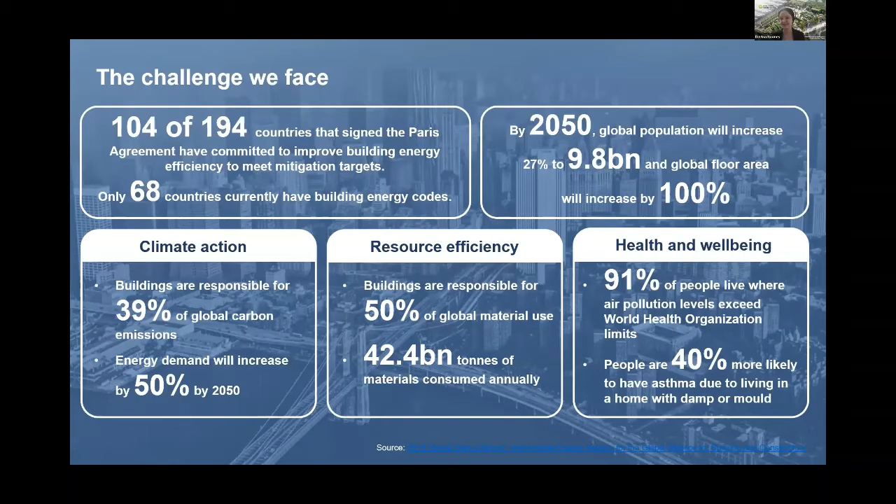If we're going to get to net zero, which all the critical reports tell us we need to do, it's fundamental for our planet that we go after the built environment sector first. It's a big opportunity, and there are a large number of simple, practical things we can do in the built form. When we say 39% of carbon emissions, that's our focus on climate action. When we say there's a huge amount of materials going into this space, that relates to circular economy. And as we've seen in the last 18 months, health and well-being are fundamental.

A big discovery moment for Australia was in the horror bushfires of 2019, 2020 - we realised just how important our air quality was. Or in the pandemic over the last 18 months, there's been absolute clarity in that area.

One of the things I draw out is when there's a headline like climate action, what does that mean? It means net zero buildings, highly efficient buildings powered by renewables. It means we need to design our buildings for the future and look at nature-based solutions. So when we look at the detailed areas we seek to unpack from buildings, they come from these global trends.

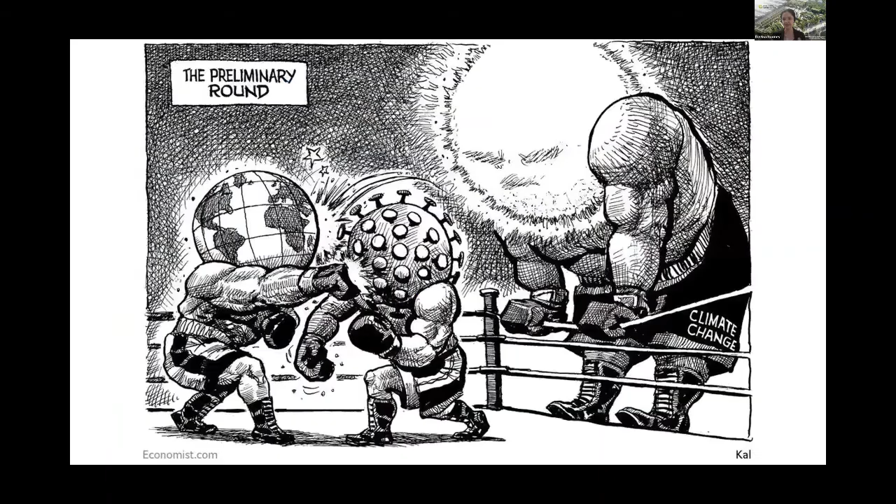Sometimes people say to me, how do we possibly focus on the environment while everything else is happening in the world right now? It's been a pretty COVID-dominated world in the last 18 months, but I think back to this cartoon from The Economist that shows planet Earth in round one with the coronavirus in the preliminary round, while the heavyweight of climate change is waiting for the later part of the discussion.

What's really clear, and what we've seen from governments around the world, is there's a real opportunity for renewal in green investment in these contexts. This is kind of the last chance saloon, as Charles said to the Australian Prime Minister this morning. If you're looking at COP, we really need to be focusing on that as our last chance saloon.

Within the last 6 weeks, a really important report, the Intergovernmental Panel on Climate Change, came out - the first of 3 reports - looking at what this means for the world in the future. The thing that report told us is that globally, we're already at 1.1 degrees over pre-industrial levels. Within Australia itself, we're at 1.4 degrees.

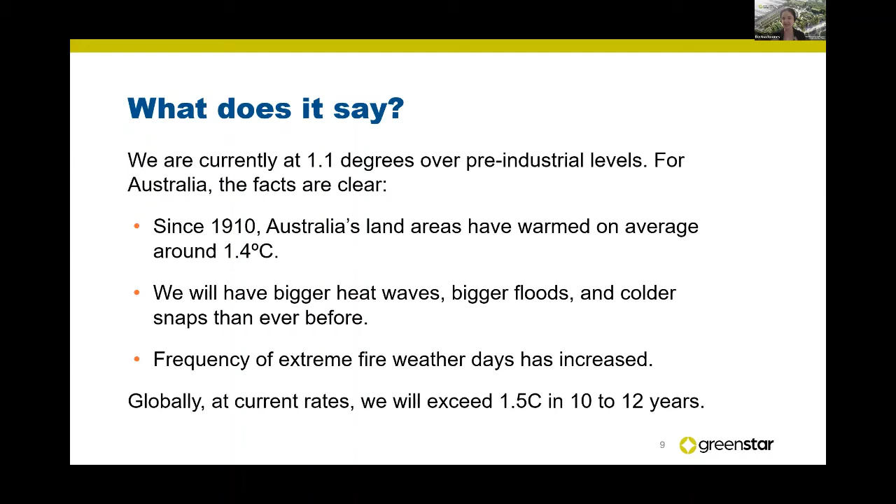What we know is we're going to see bigger heat waves, bigger floods, colder weather snaps, and increased frequency of extreme events. If we keep going at current rates, we're going to exceed 1.5 degrees, which is considered by most scientists as a critical tipping point, in 10 to 12 years. This is the red alert report that we absolutely need to see and see how we can change. It recommends strong, rapid and sustained reductions, net zero emissions by 2050 at the latest, and a focus on nature-based solutions.

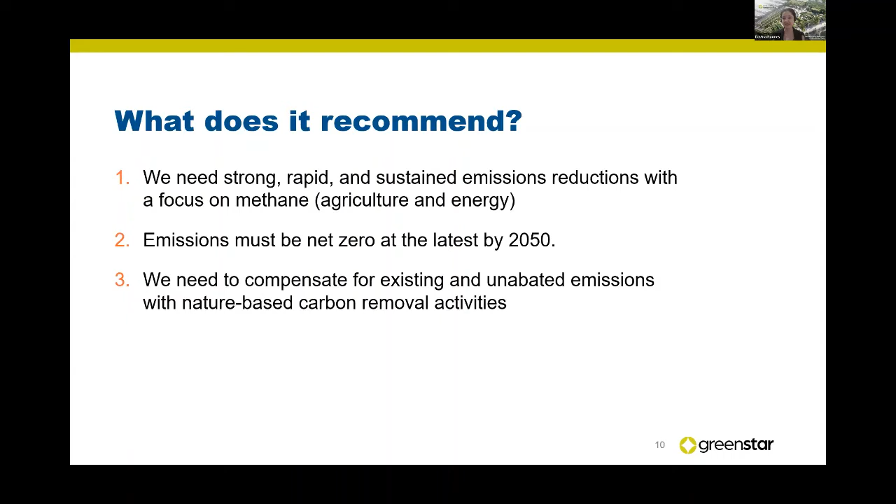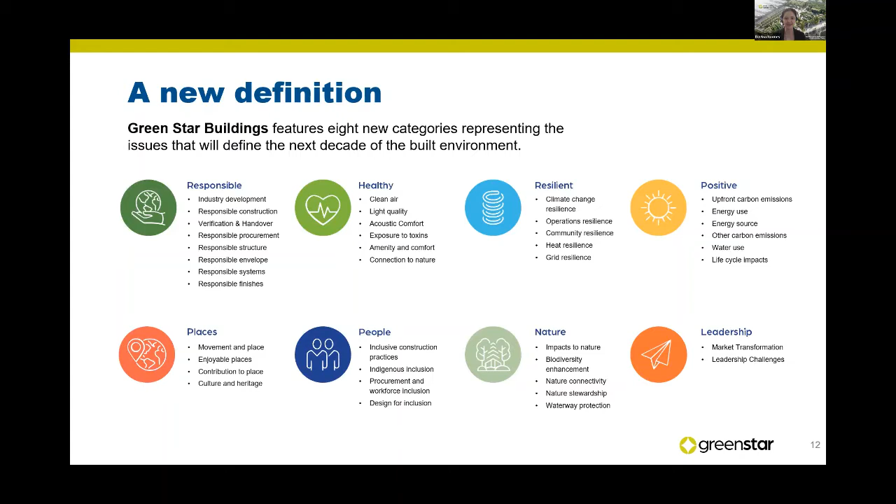So many of us would say, how does this possibly relate to buildings? It means we need responsible, healthy, resilient and positive places designed around people and nature. In practical terms, some of what you'll see Jonathan unpack is that we need buildings with an enormous focus on light quality and daylight. We need them focused on net zero, driving efficiency to the absolute limit, so we can have the most efficient buildings, ready for net zero or delivering net zero now.

That needs to be an enormous focus on this space, whilst we look at biodiversity impacts and a whole suite of issues.

But one of the things that's really heartening to see in these spaces is when we line up what we want to achieve and translate them, take the global trends, translate them into rating tools, projects like the one we're about to discuss, and embed them in their projects, and we can see those really clearly implemented. So Burwood Brickworks, which is the project behind me's...

6-star Green Star rated. It has more renewables, so it's net zero in operation. It actually produces more energy than is used on site. It's also water positive. It also has rooftop gardens that are used in some of the restaurants inside, and aspects of which are open to the community. So really project examples, bringing these concepts to life.

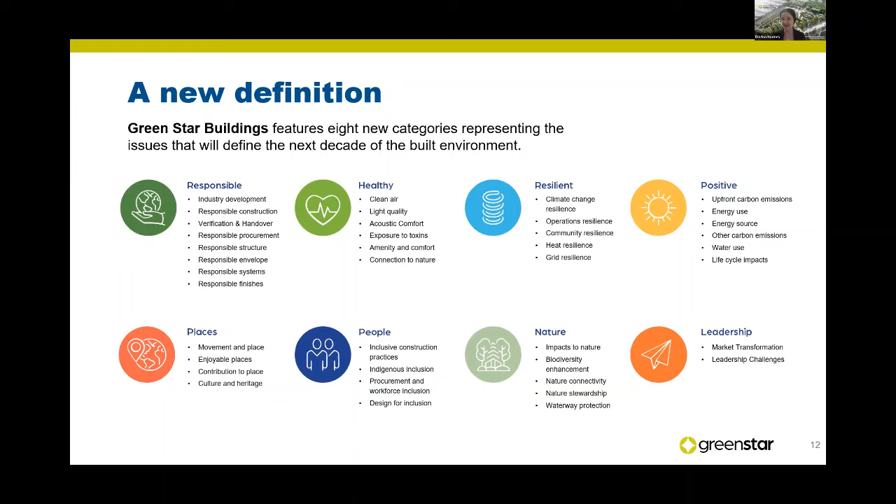And what I'm really enthusiastic about is we're going to use this discussion to unpack how do we take these ideas, how do we take a case study, and then how do we implement them, and hear great questions from the audience. How do we actually implement more of those at scale?

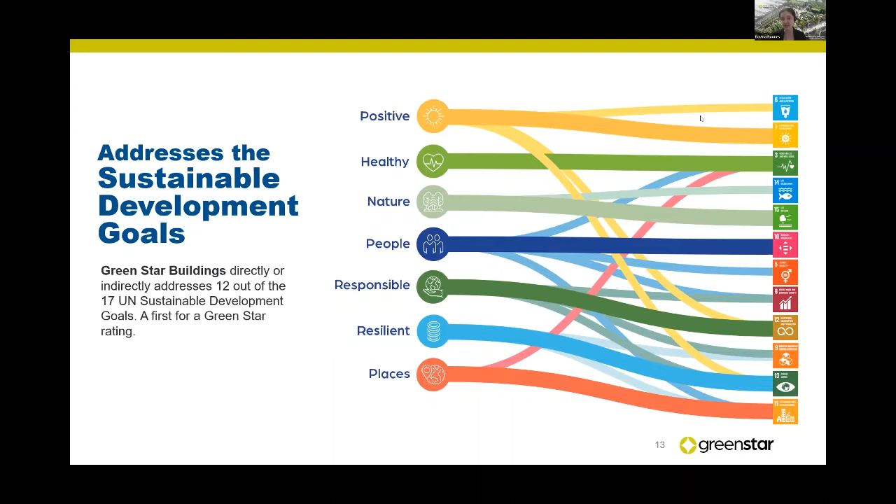And what's really important is when we look at buildings, we absolutely need to be looking at the United Nations Sustainable Development Goals. So picking out all the critical elements that are necessary for the future of the planet, be those aspects directly around energy, water, waste, or how we partner to drive change. There's an enormous amount of areas that we need to be working together to drive in these aspects.

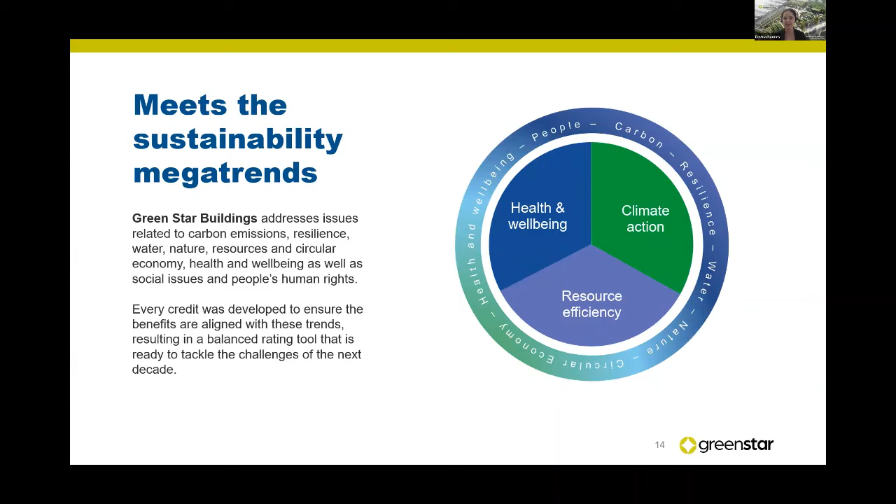And so what we did when we designed the next version of the tool was we took the key focus areas: health and wellbeing, climate action, resource efficiency. This isn't actually a beautiful PR diagram, this is actually a pie chart of how we allocated the points. So 39% of the tool is on climate action, a third is on resource efficiency, the balance is on health and wellbeing. So we absolutely align what we're going to deliver out of the built environment to the needs on projects.

And so people often say, when you're talking about these buildings, what are the minimum things that you would absolutely be looking at? The things you'd be really focused on are protecting environmentally significant areas, making sure that they emit less carbon, both in the way they're built - people call that upfront carbon emissions, or embodied carbon sometimes. Water efficient taps and toilets that are as efficient as possible, and improved air, light, and acoustics that promote physical well-being in people, and really importantly that it's designed for the future - built to withstand the impacts of climate change.

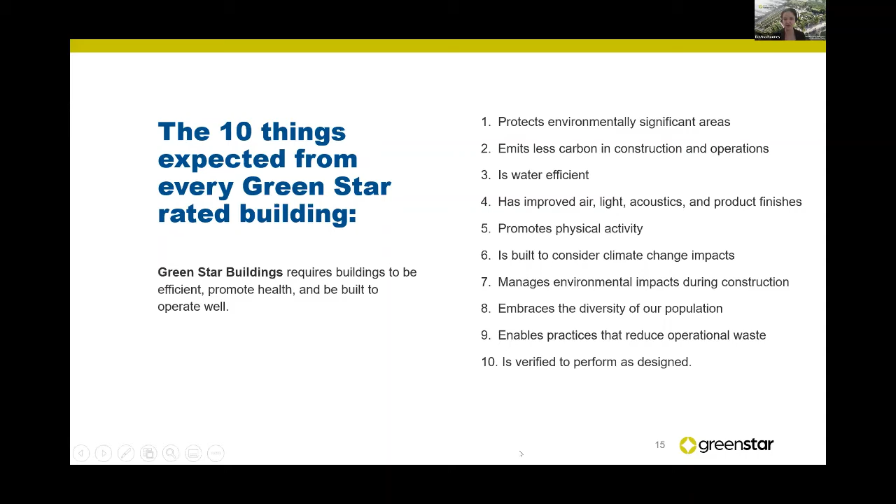It absolutely looks to manage environmental impacts during construction, focus on diversity and operational waste, and then really critically, it's verified - someone checked. This is absolutely the same with the LEED rating system that Jonathan's going to be using as the framework for the building. It's someone checked that you did what you said you'd do, and it was verified that it would perform in that way.

And so when people say to me, what are the rewards, apart from having better light quality for my customers, what's in it for me? Why would I seek to implement these frameworks? It was when we're talking with Martin, he was saying one of the challenges we'd like to unpack in the discussion is that people are always asking us, what does it look like in this space? Why would I pay more for this?

So one of the trends I'd like to note is green finance as a trend. We're finding that sustainable buildings have far greater investor demand for them. And people say, but it'll cost more - 10%, 15%, 20% more. We've done quite a lot of research in this area and found that it costs 1 to 3% more - around 1% for a best practice building, 2.5% to 3% for country level excellence or global excellence metric. But we've done research in those asset classes and found that as soon as those buildings are delivered, verified to higher sustainability standards, they're a 5% premium in value when they're sold. Their net income is 13% more, and people want to stay longer.

So in the office buildings, that is their weighted average lease expiry, which is a technical term for how long people are going to stay. They stay on average 25% longer, and that's before you even look at critical research from our partners in the United States about the productivity gains people get from being in these spaces. They feel better, they do better work, which can directly correlate into profitability numbers, annual profit contributed by those employees to their company.

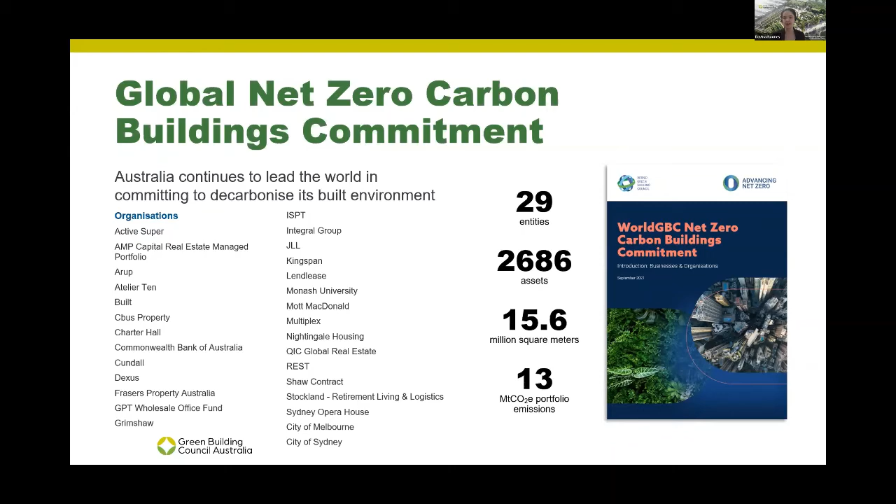This shows that it's not just about new buildings when you take on these challenges, it can absolutely be expanded to existing buildings as well. One of our partners who's been working in this space for a really long time, GPT with their wholesale office fund, last year certified carbon neutral across their existing portfolio range. They managed that 45% through building efficiency, about the same amount through renewables, and they bought nature-based offsets for the remainder. But what this shows is that this can be done absolutely right now.

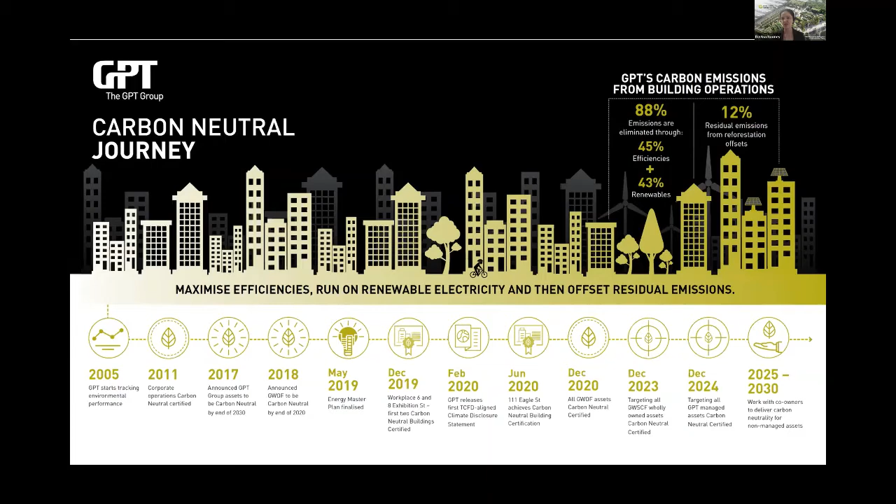And the bit I'd like to unpack in the discussion panel is that this was done while actually delivering $10 million savings a year. Across this portfolio, their efficiencies have been over $250 million across GPT in savings that they've actually been able to deliver out of these programs since inception. So what we're seeing is when these things are done right, as part of a staged program at scale, we see enormous opportunities for these to be delivered.

So I'm going to pause there in terms of setting the scene in what sustainable buildings look like. And I'm going to hand over to Jonathan, who's going to give us an example of how this looks in his key project, and then we're going to unpack it together in discussion. So thank you so much, Jonathan, and over to you. Thank you very much, Davina. Let me share my screen.

So I'm very excited to present the Toha building. It's a work we completed last year with Ron Arad Architects from London, and it's a very unique design. The developers were Amot and Gav-Yam, two very dominant real estate companies from Israel, and it won Best Building by the Council for Tall Buildings and Urban Habitat. It also won the Best Green Building Award and also an award for the interior design in the same competition.

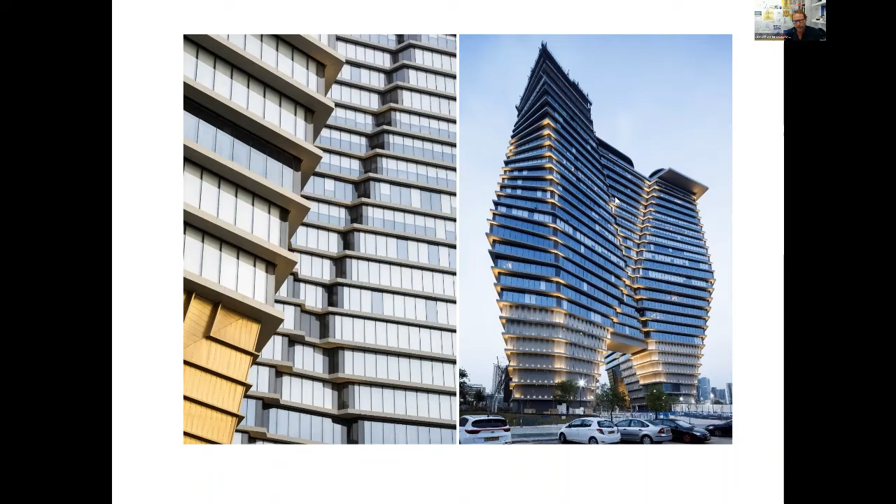And the uniqueness of this building definitely is derived by its approach to sustainability and innovation. From whatever angle you look at it, it looks different, and it looks like it's done something different to the surrounding of this building. The key idea about this building first is that it doesn't take out a lot of the footprint from the landscape. It's basically raised by 6 floors of technical facilities from the landscape, and these technical facilities allow for a very good and broad space in the landscape. It also frees up the rooftop, freeing up another usable space that we've taken from the land.

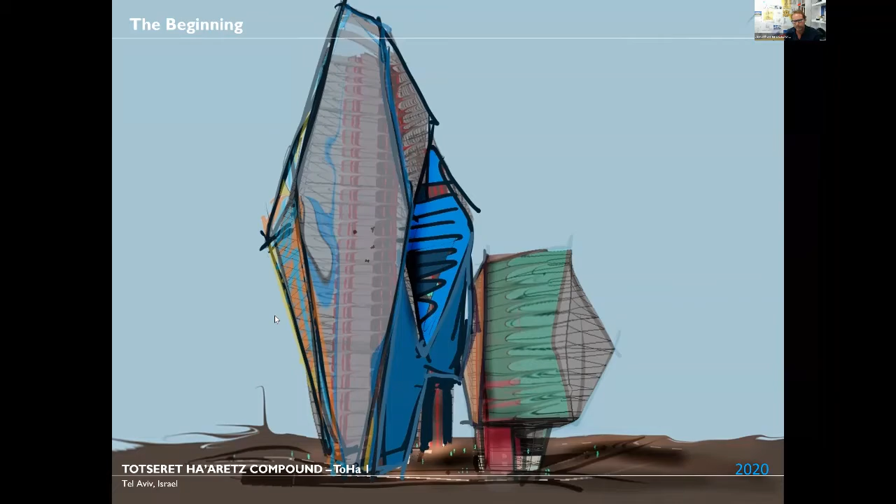And obviously when you construct a new building, the significant thing you do is you take up land that could have been used for landscaping or agriculture, and you need to give some of this land back. The initial design and the 57,000 square meter development is actually the smaller part of the development. We are now designing the 80-floor addition to this complex. These are drawings by Ron Arad, an incredibly innovative designer who set a lot of these ideas at the beginning of the process.

Another important issue is actually building in a central location. When you build in a central location, these are the first ideas.

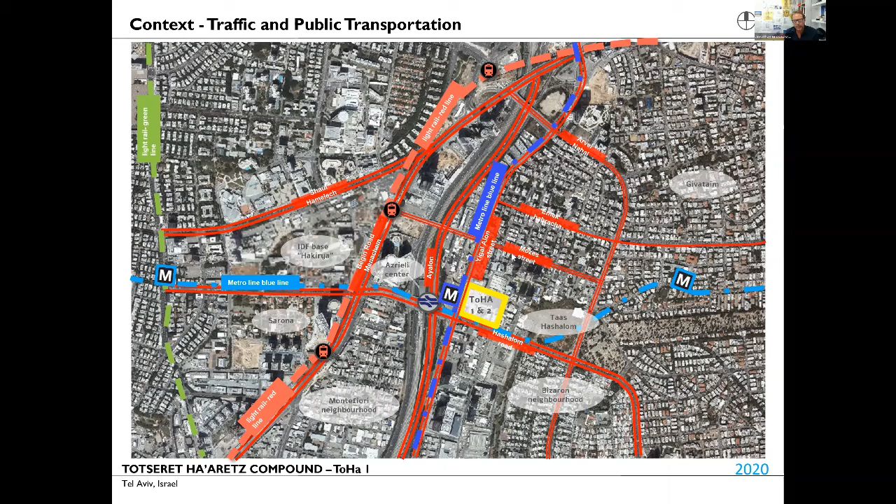The first goal is to minimize the use of cars. People arrive with public transport, and this doesn't have anything to do with whatever type of building it is. Every car we take off the road, with people using public transport instead, has a much more significant impact on the environment.

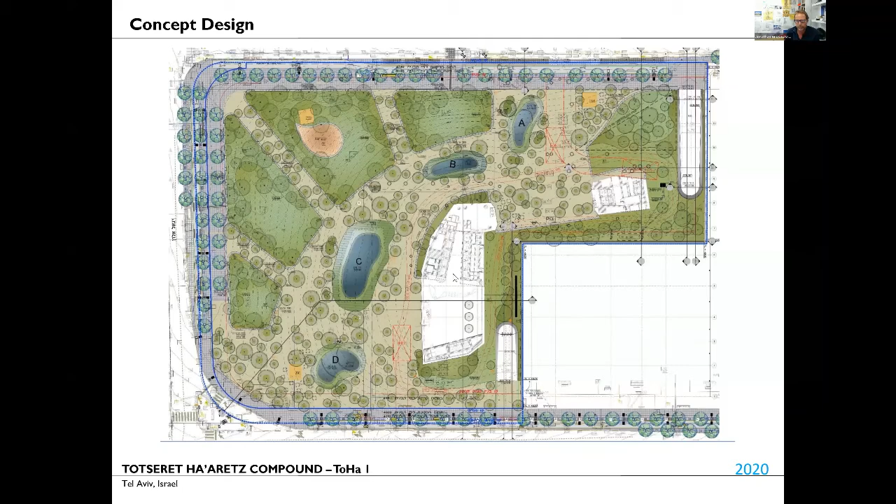Looking at the site, we can see this is the first development with a minimum footprint of the building. There are three cores that reach the ground, and on top of it the building begins its floors. The building has a very unique atrium in the center.

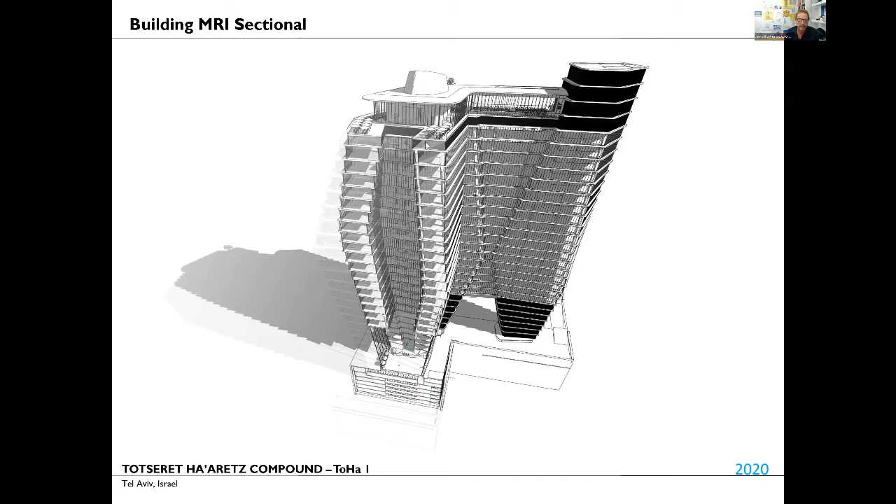This atrium is used to cool the mass of the building, so air enters through the lower floors and reaches up to the top floor, where it's taken out one floor below the rooftop.

The structure is very unique as well. There is no one straight column, because raising those 3,000 square meters of office floors from the ground by three cores required a very different type of structure. The columns we used actually change their vectors somewhere along the way.

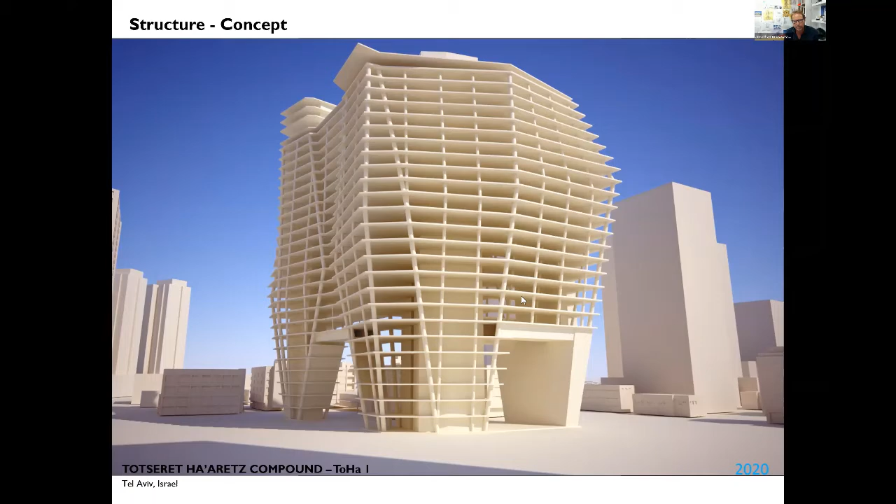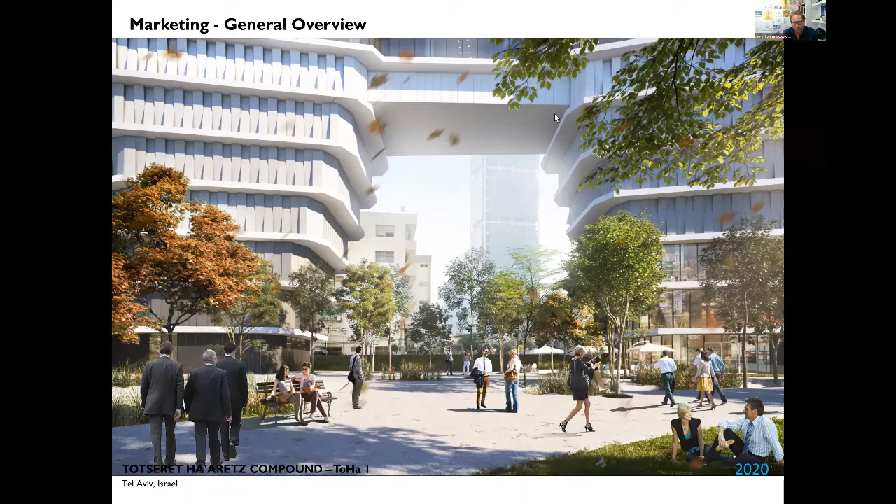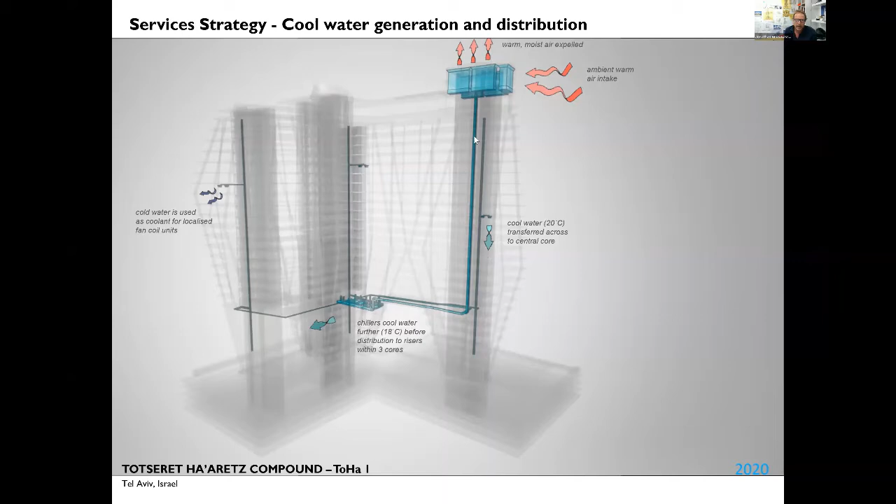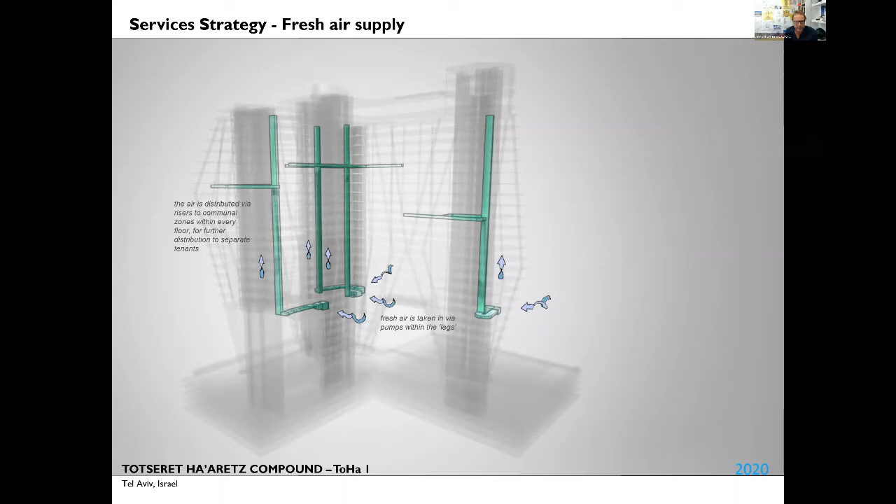There's also another issue. When we deal with those cores halfway through the buildings, we were able to use water-cooled chillers, which save up space and allow us to free up the roof. The water from those water-cooled chillers is used for watering the landscape, so we actually scored the top score on the reuse of water on this site.

All the systems are located on the first 6 floors, and we're also taking in air from those lower legs and pumping it up to the building.

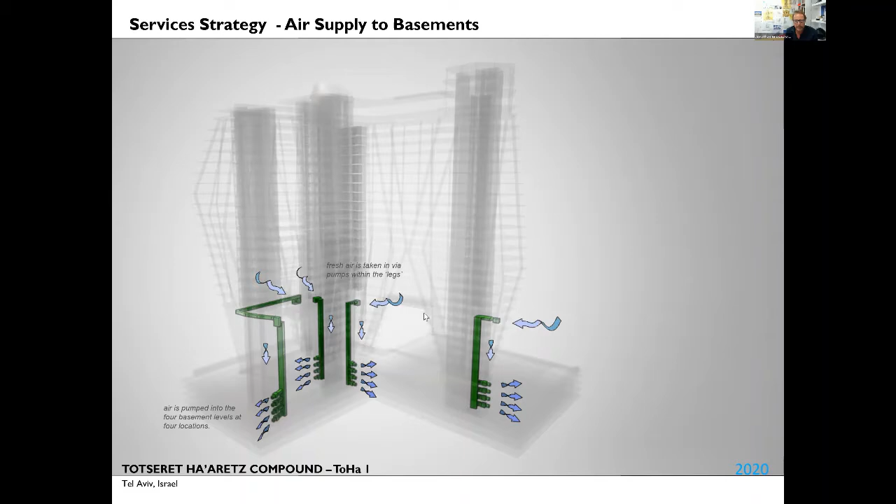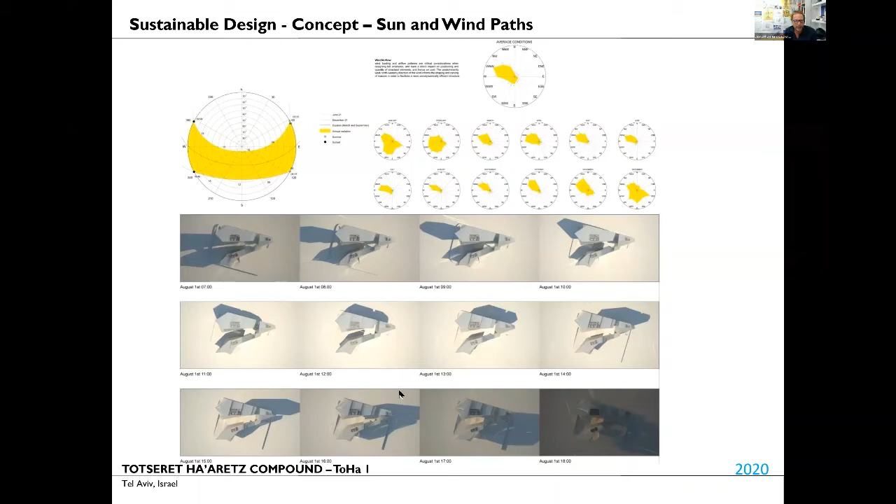I think with this project, sustainable design was a key concept from the beginning. When you do this, every time you're tackled with an issue you have to solve it. Whether dealing with sunlight, glazing, or floor layout, you always go back to those initial concepts and reflect on how this works together with sustainability, the well-being of people in the building, and how you save energy through this work.

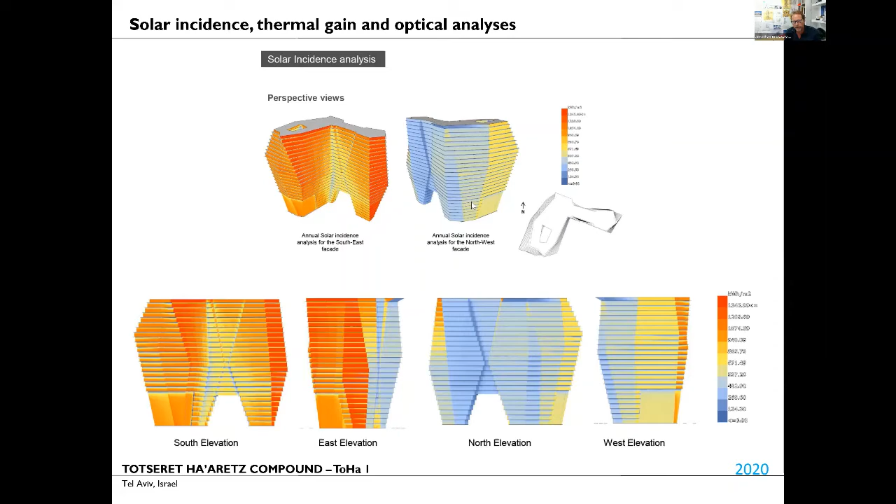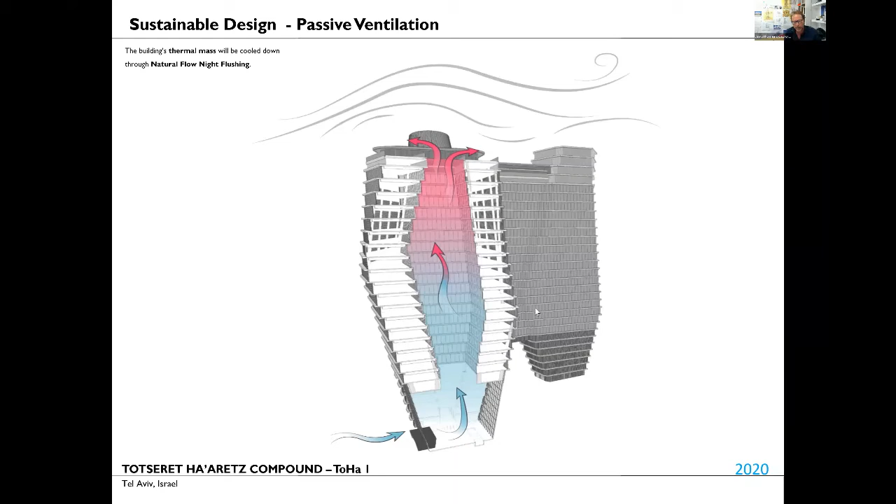A lot of issues definitely relate to sunlight, with the angles of the building allowing it to shade parts of itself and react to the orbit of the sun, and which facades take up most of the sun - obviously the southern and eastern facades, which take up a lot of heat during work hours. But we were also able to cool the buildings in the early hours of the morning by pumping air through the atrium and cooling the mass of the building.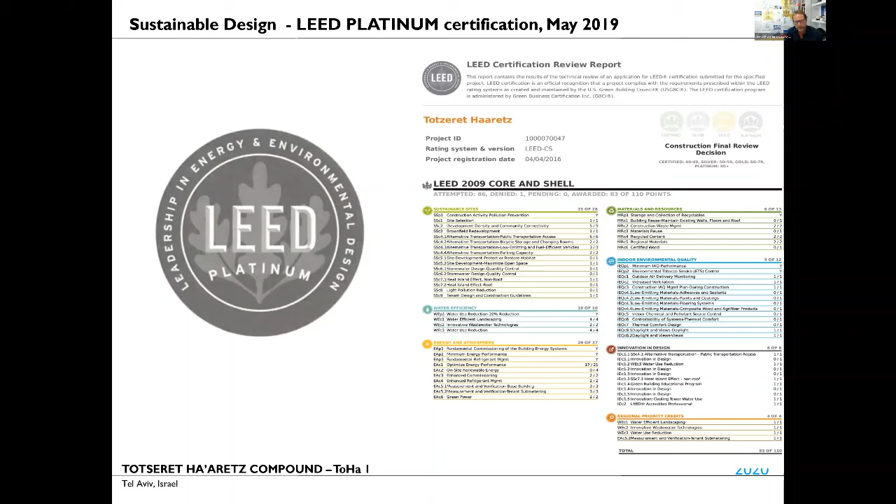This building was the first to receive a platinum certification using LEED, the American system. Part of the idea of using LEED is that a lot of those companies that occupy the buildings have offices in the US and have knowledge of the US standards.

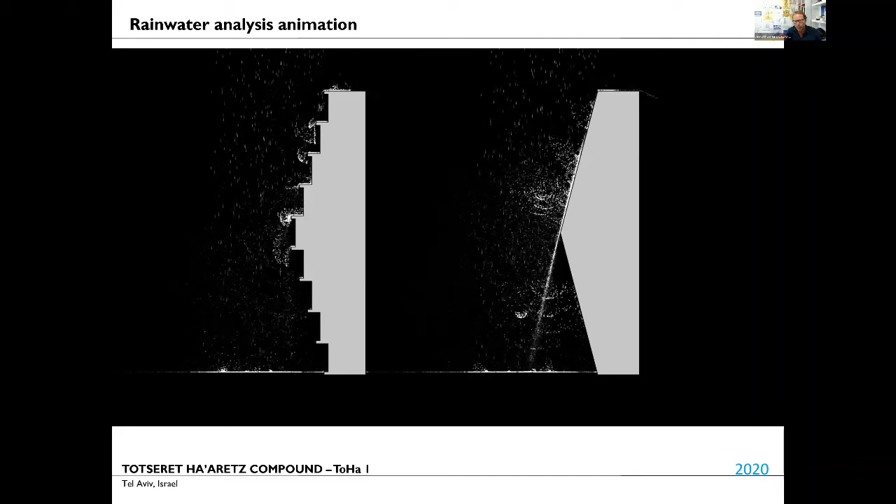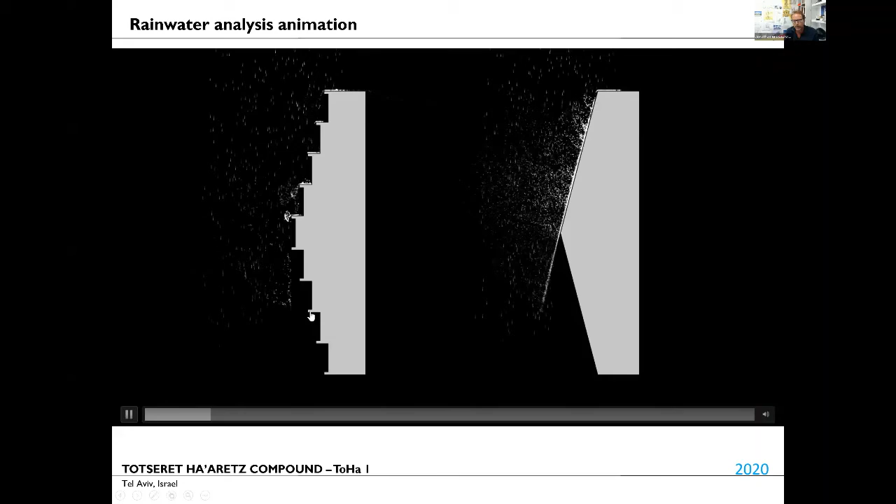We've even got to a point where we've looked at how water drips on the building, and whether we're able to allow water to reach the ground at a slower pace, then go down into the earth, rather than just having floods on the lower levels - instead of having all the water go through the drainage system directly to the sea.

So sunlight was a big issue, and the facades was another issue we addressed, using a double skin facade here. We used cool chillers and the water cooling system for those chillers.

We use a dual flush WC for all the toilets. We're cleaning the water and then reusing it for the landscape. And we have this atrium night cooling that allows air to go through the building and cool it during the early hours of the morning.

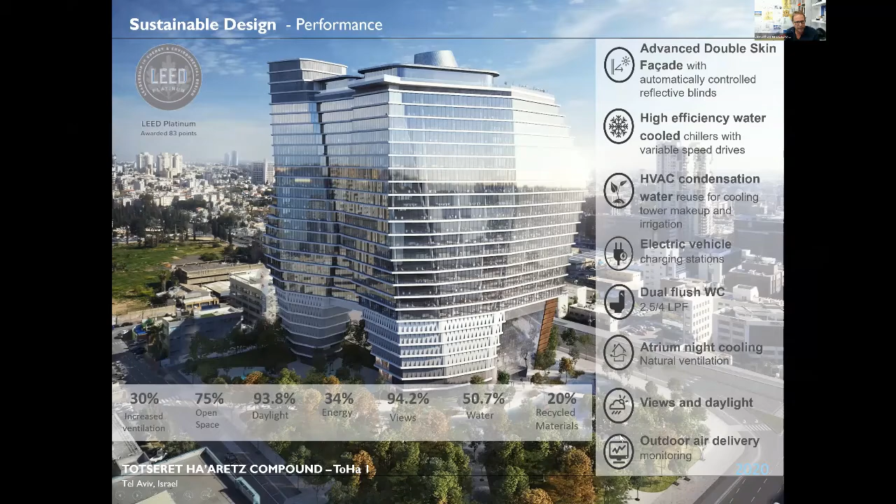We're monitoring - this is a small but key issue - all the deliveries through and into the building to minimize waste. Using double skin facades, we have a layer of air in between the first layer of glass and the double skin, with double glazed glass in the interior part.

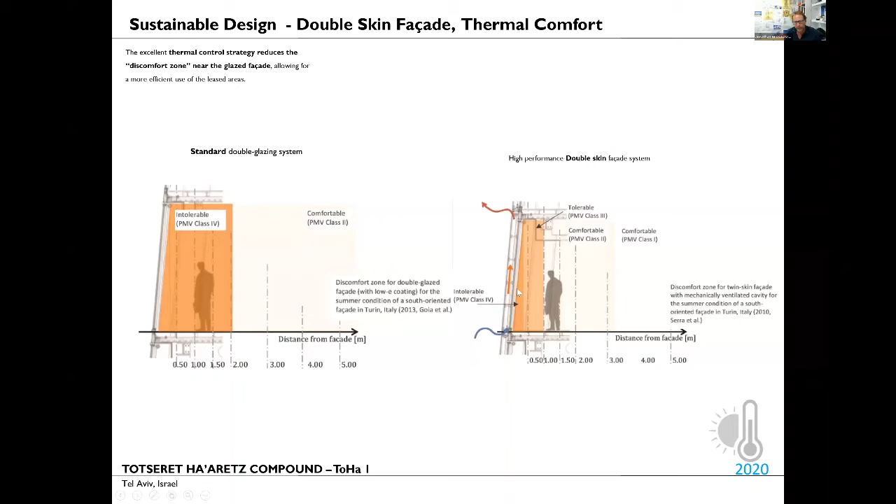This allows air to insulate the building, where the cavity between those glasses is being sucked to the rooftop. This air is then cooled in between and insulates the building. It also allows for better use of the area next to the walls of the building, so it has an economical impact on companies that rent the buildings and know they can use every square meter inside.

So this is the system, and we were able to show tenants how they can make better use of their environment inside the floor space.

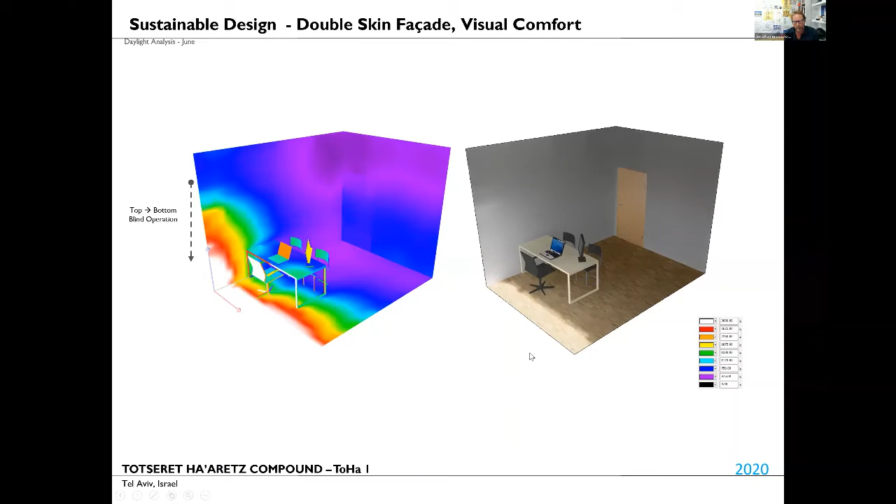We've looked at how wind goes around the building, and what sort of wind mass we have on the lower floors and on the upper floors, and tweaked the design of the building accordingly.

And eventually we received this, the ToHa building, and you see here the rooftop is used for a restaurant for over 350 people. Then we grew the vegetation throughout the construction of the building, so when it's now finished, we have vegetation that is fully grown.

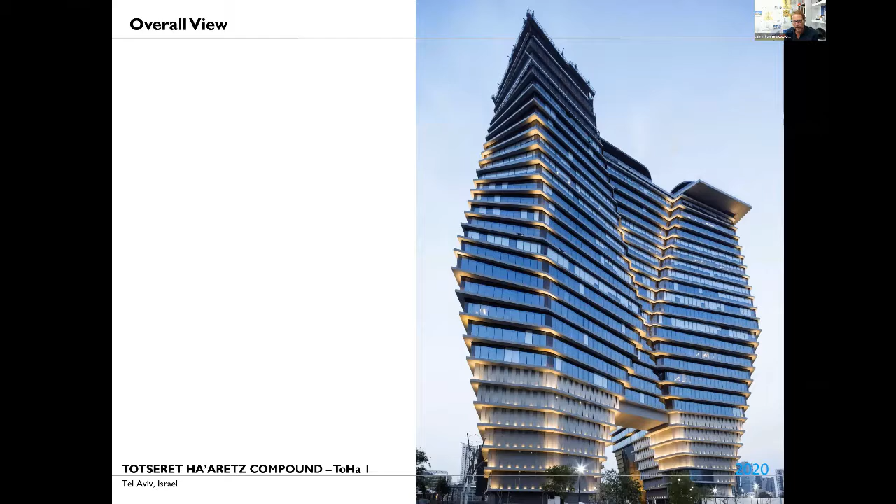This is the first part of the ToHa, and here you can see those legs that raise the building and have the floors on top of these legs starting from the 7th floor, and how we freed up the roof.

A key importance is those shelves that we call horizontal terraces that we have, and this allows shading for each floor.

Usually when you have a curtain wall system there's no shading, or you're adding some complex system that isn't very pleasing and doesn't do the work.

Here what we've done is created these shading shelves that shade every floor, and this is very important. With a small shading shelf, I think you're saving more than 30% of the energy, more than 70% of the cooling system you need inside the floor.

So here you see the atrium to the building, and we have windows here that open up to allow air to come in through the lower floors and then go up to the roof.

The landscaping was very important. We had an excellent landscape designer, an Israeli firm called Tema, and we're using biological pools. We're recycling water from the building to water the planting, with self-sustained biological pools around the building.

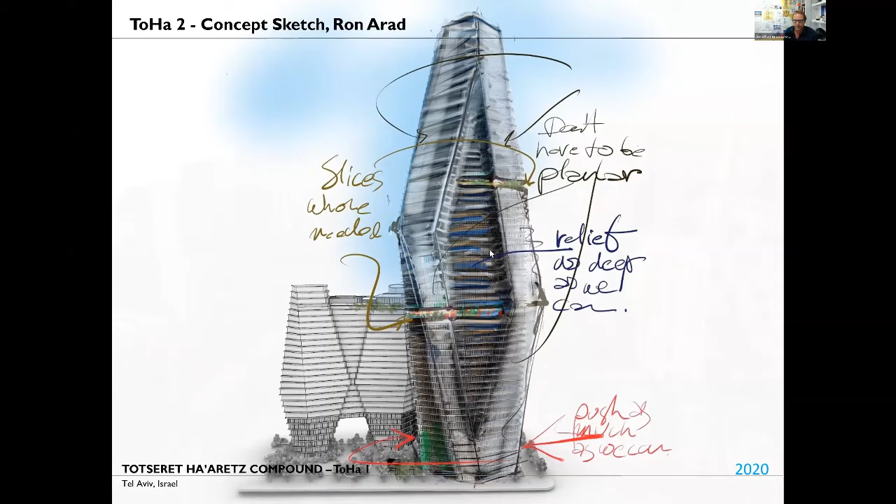This development will still maintain that balance - we're actually using about a third of the site for construction, and two-thirds is left for landscaping.

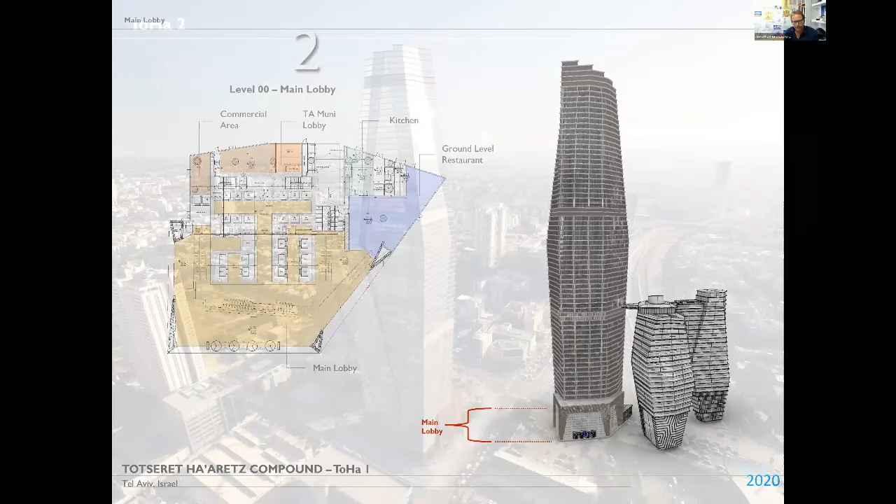And we'll have two metro stations at the entrance to those towers. Hopefully they'll be completed when the tower is complete, around 2025, since we've already started construction for the second tower now.

In terms of rents, this tower has achieved the highest rent ever paid for a development of this kind. So companies and the public definitely acknowledge the sustainability and design of the project, and it's become a landmark and a benchmark for other developments to continue.

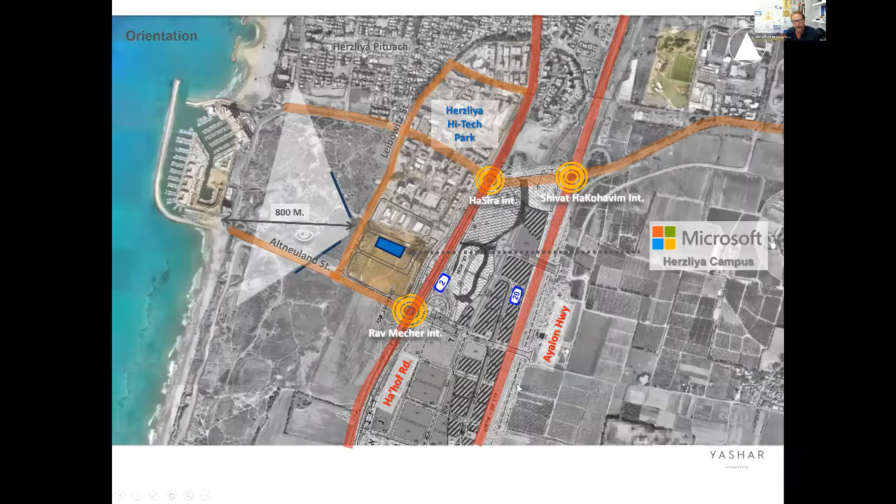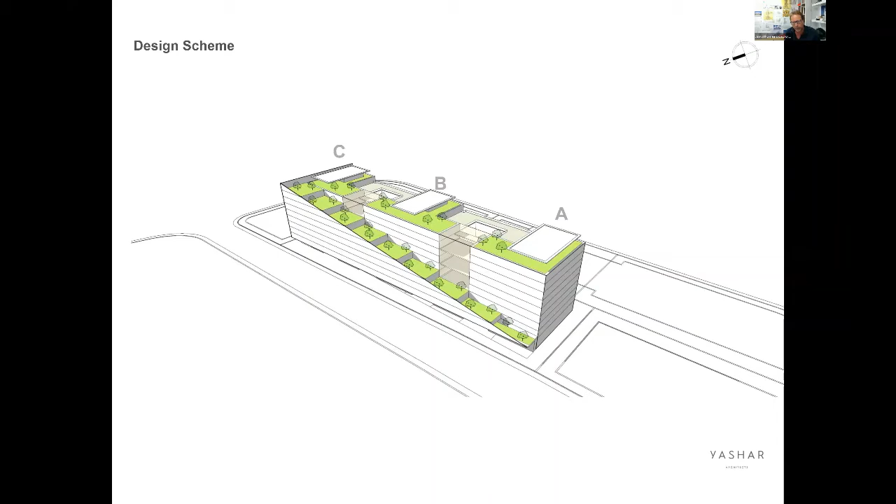The second project I'll be showing is the Microsoft complex. Microsoft has set up a very big development site in Israel, in Herzliya, not far from the beachfront, and we wanted this development to have views to the beach and the ability for people to walk outside of the building as well as inside.

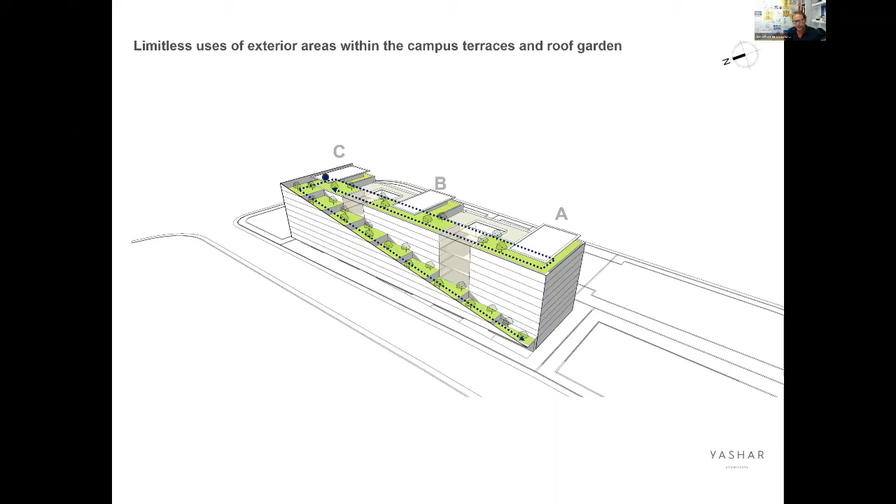So going out from every floor, reaching not just by using the elevators but using terraces and steps going from inside to outside and back again.

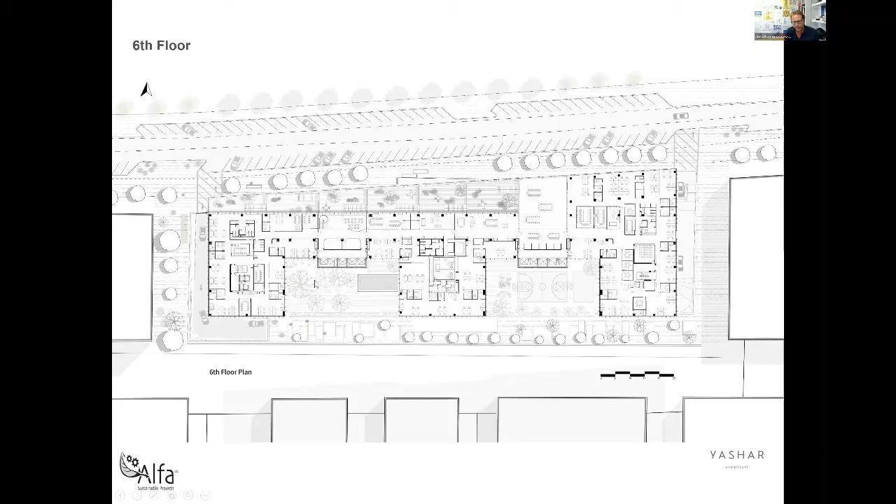Again, we've freed up a lot of the space within, after the first floor plan, in order to allow for planting and those terraces that climb up to the rooftop.

And in this building you can see how people can come out from each floor and walk using stairs, going up to floors, going to meetings, with meetings being conducted on the floors and on terraces outside of the building.

Being outside but also inside of the building, having views to the beach. We freed up all the rooftop for planting and spaces for people to spend time outdoors. This is very important for the well-being of people inside the offices. The sustainability ideas aren't just technical issues, they're issues of psychology and well-being, having people relate to a building that has outdoor space and isn't just a box of offices.